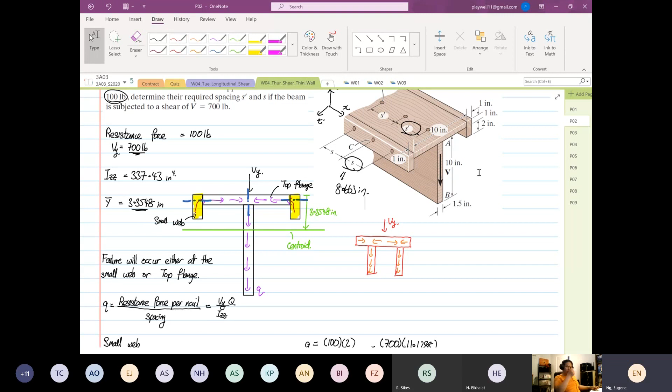Okay, so the next thing that we do, let me copy the diagram again, and I'm going to copy whatever comes along with it.

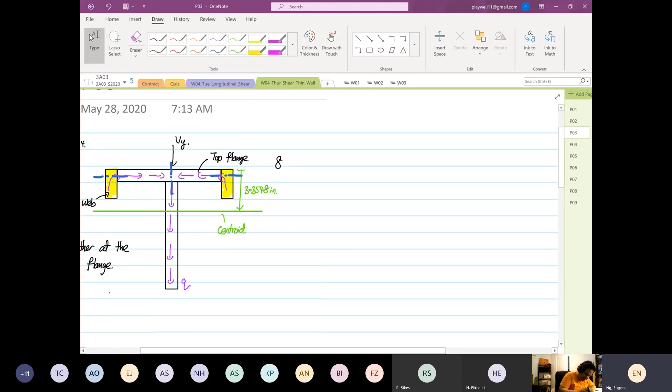Right, so the next thing we're going to look at is the vertical nail spacing. So the only thing that changed is you have to include this area now.

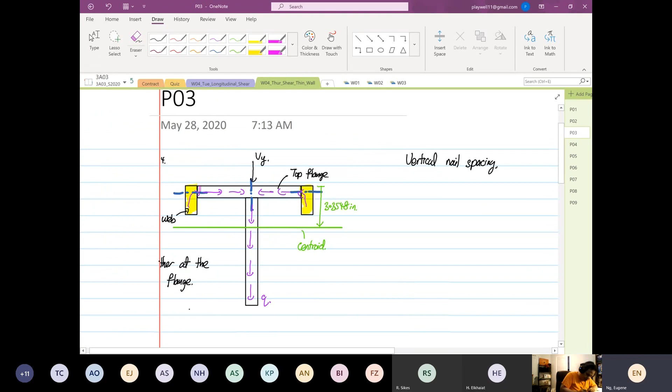For the vertical nail, the Q will be the Q of the small web plus the Q of the top flange. So we found our small web earlier is 11.1288. The width of the top flange is equal to 10.

The depth is 1, multiplied by the Y bar, which is 3.3548, minus 1 divided by 2. So this is equal to 11.1288 plus 3.3548 minus 0.5, times 1, times 10, which is equal to 28.548.

So this will be equal to, plus 11.1288, is equal to 39.6768.

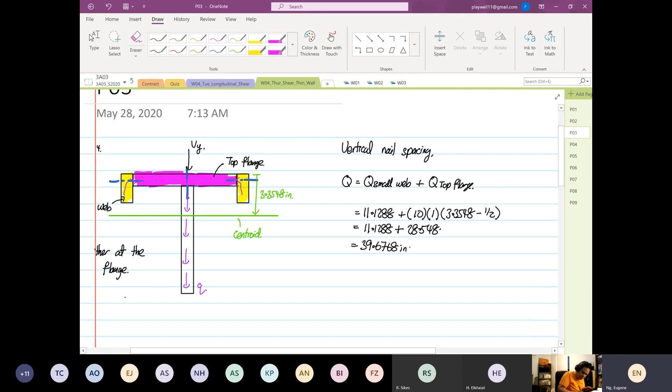So from here, again plugging in the formula, Q is equal to V multiplied by first moment of area, which is 39.6768. The values for V and I are the same.

The only thing that changed is the Q. So for this reason, if we calculate S, it's 100 times 337.43 divided by 700, divided by 39.6768. So this will be 1.2149 inches of spacing.

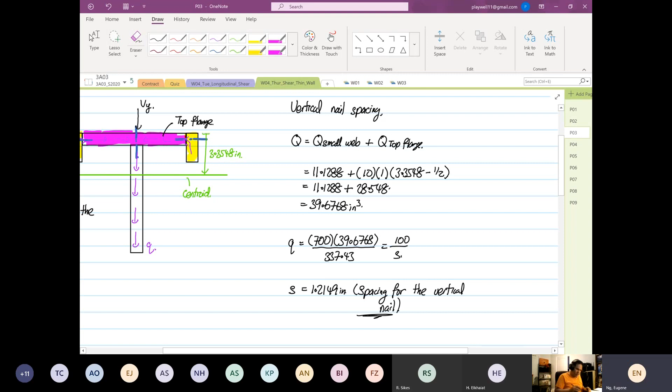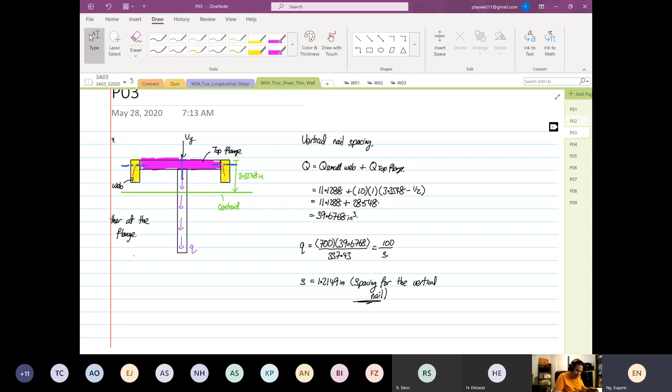So this is the spacing for the vertical nail. Because the first moment of area for Vy, or for the vertical nail, is higher, the spacing for the vertical nail, S, is equal to 1.2149.

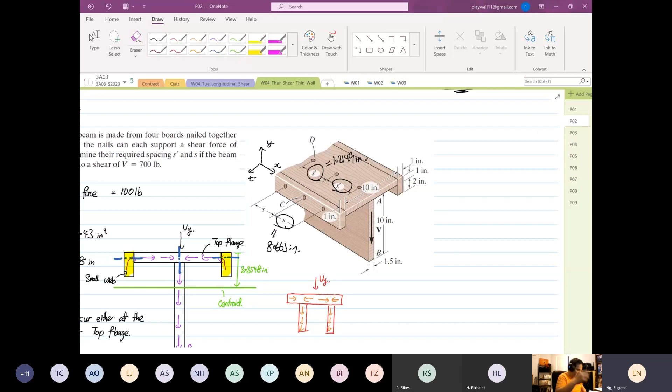Okay, so that's how you determine the spacing of the nail based on failure. Any questions so far? Do you all find this topic confusing? The rules did not change, right? You still apply the formulas: the shear flow Q is equal to VQ over I, the shear stress is equal to VQ over IT. Nothing changed. The only extra formula you learn is this one.

That's it. Okay, now I'm going to go to the next section. Before I go to the next section, any questions so far? No? Okay. So we have the shear flow entering our beam and exiting our beam. Should we always start where the shear flow enters and work towards where it exits?

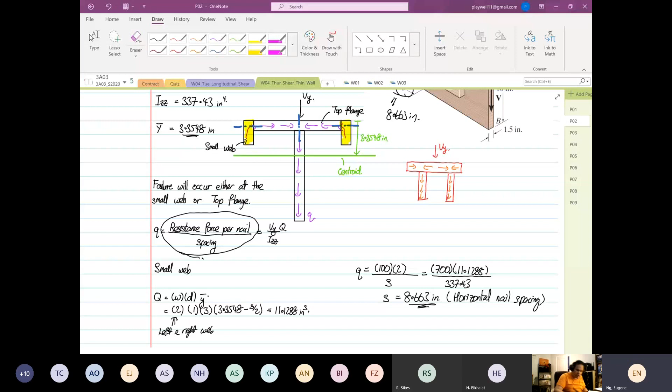So you usually start by looking at the vertical web. The vertical web, usually the shear flow will start from the top and go down to the bottom. Then if the Vy is at the bottom, you go from the bottom to the top. That's where the next section comes in. So I'm going to start a new section now. I hope that answers your question. Yes.

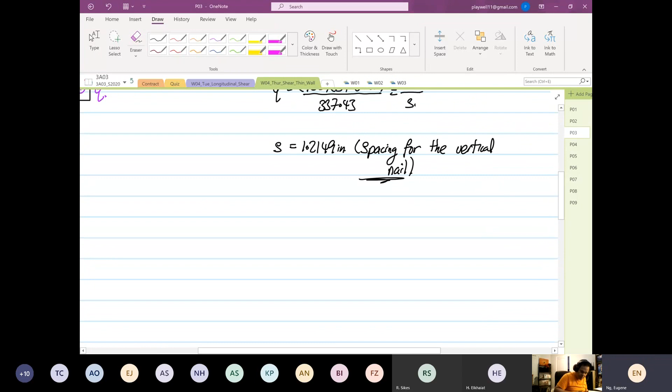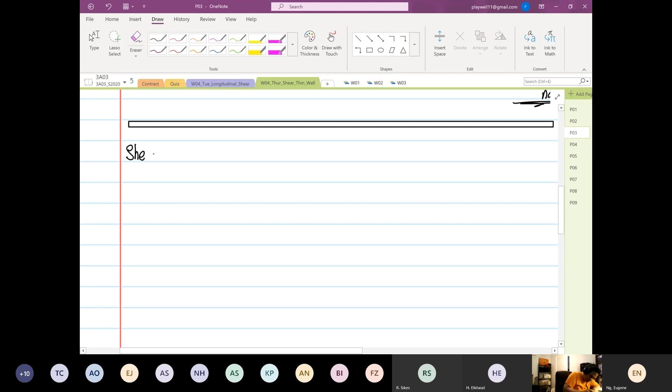Okay, so now the next section is going to be shearing stress in thin wall sections. I want you all to pay attention - this is for thin wall sections only. What we have learned so far, they're all thick wall section. So this is only for thin wall section. So the rule to apply, I'll tell you what is the change.

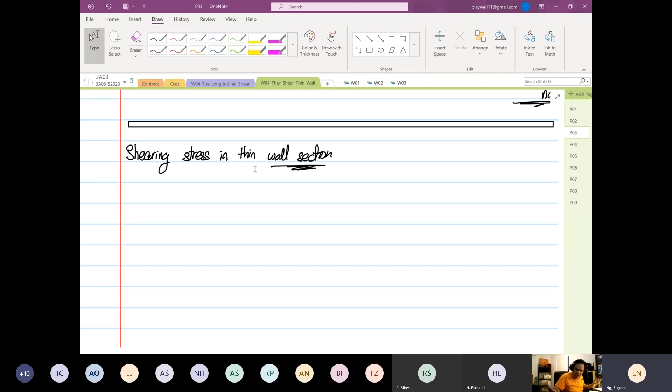I more or less have introduced it slightly to you already. So what is the change?

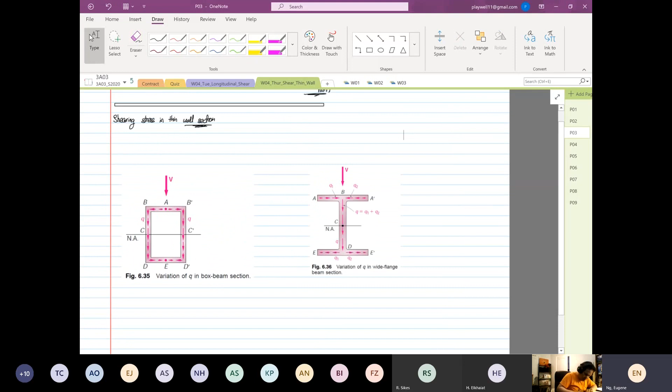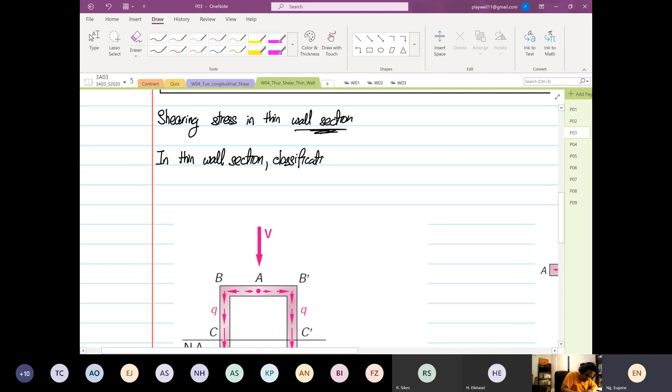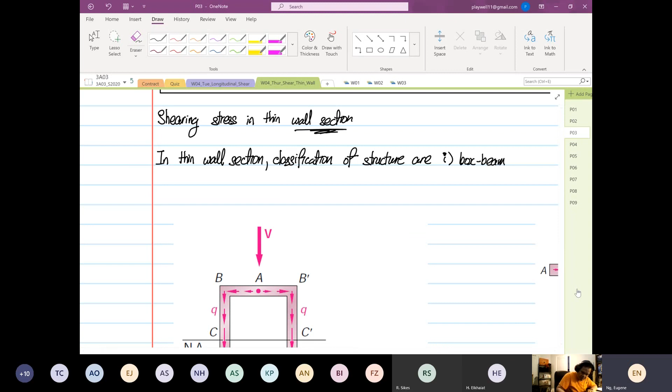So in thin wall section, we classify it into 2 views or 2 configurations. So in thin wall section, classification of structure - the first one, it can either be a box beam, right? It can either be a box beam or wide flange, okay, or wide flange.

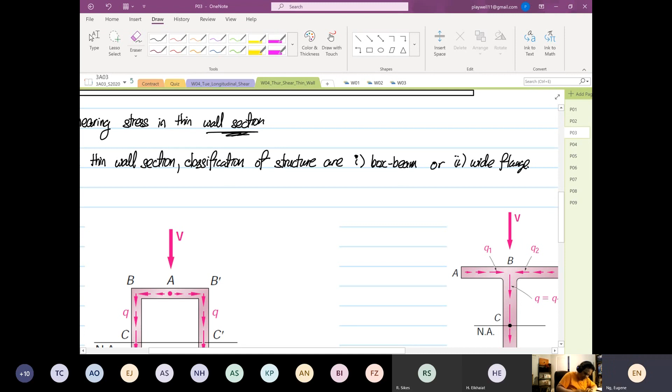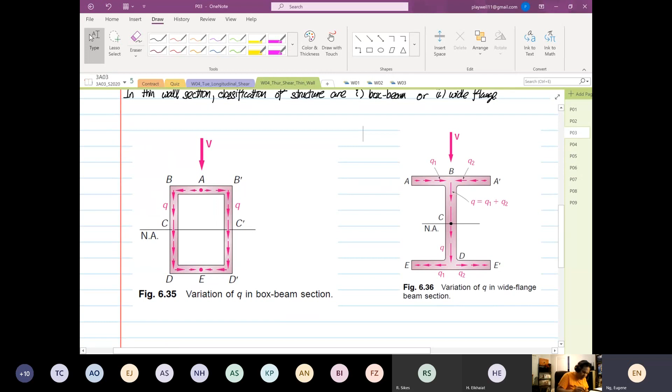So on your left hand side, what you see is a box beam. On the right hand side is your wide flange. So what is common between the two, like what I told you? First thing I want to highlight: the length of the arrow, the length of the shear flow, is equivalent to the magnitude of the shear flow.

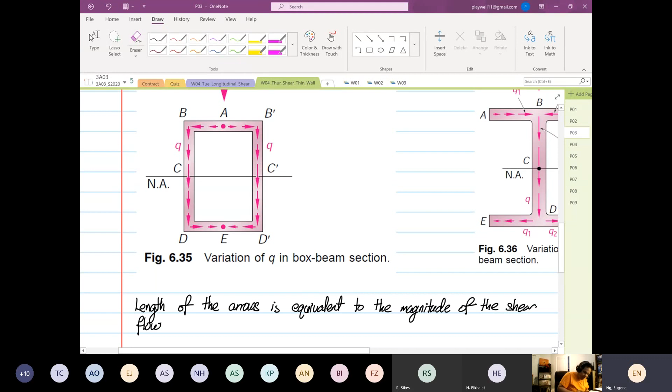So you can see at point A, this area that I'm highlighting now, the arrow is shorter. Means the shear flow is smaller. At the section over here, the arrow is longer. Longer means the shear flow magnitude is higher. Likewise for here, shorter and longer. You can see that for the wide flange.

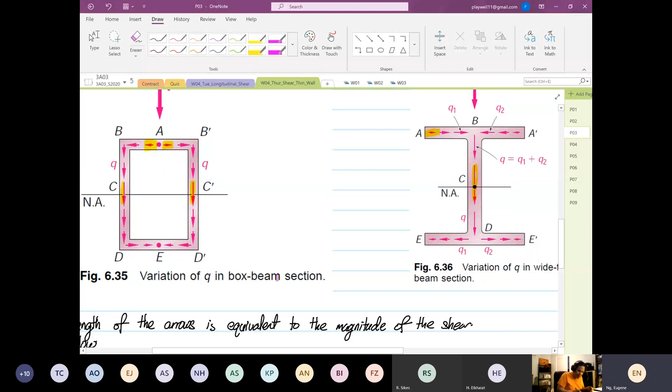So the only thing that is common between the box beam and the wide flange is the vertical web - the arrows all are coming down. Yes or no? The vertical web, all the arrows are coming down. You can see that, yes or no? Right, vertical web, all the arrows. So that's the only thing that's common.

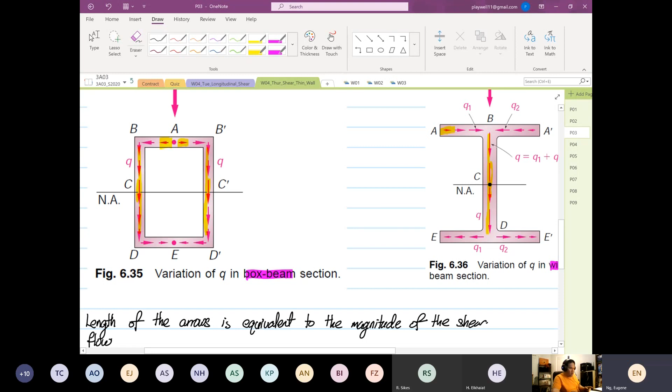On the flange, depending on if it's box beam, it will start from A and move outwards. And what controls it is, like what I told you before - you guys have seen this already, we've sketched a bit, so it should not be a surprise. The control is the vertical web. So for this case, on the wide flange it's coming towards the what?

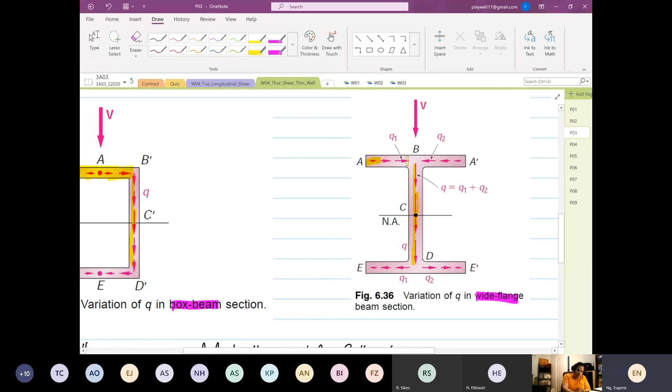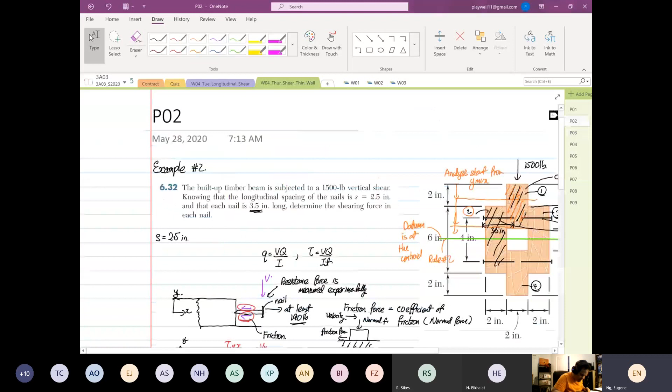Towards the center. Okay, so if you look at the previous example that we have drawn for this case, like we have drawn - this is not, you cannot see anything now, right? This is exactly how I introduce you unconsciously to make sure that you're able to sketch the shear flow, okay.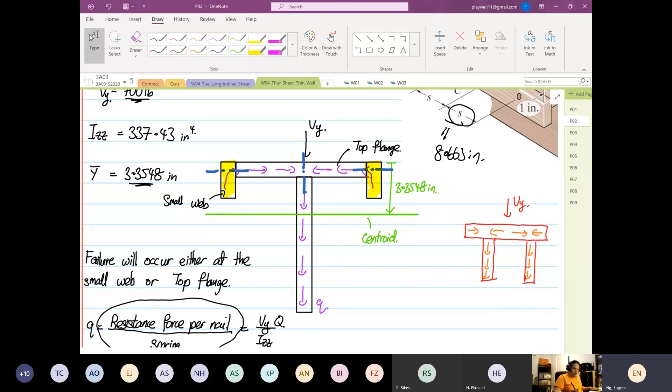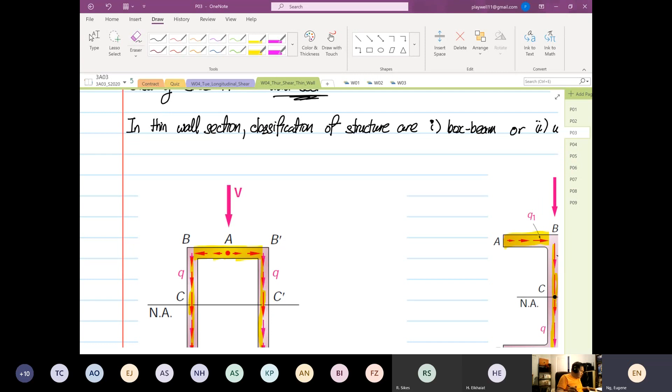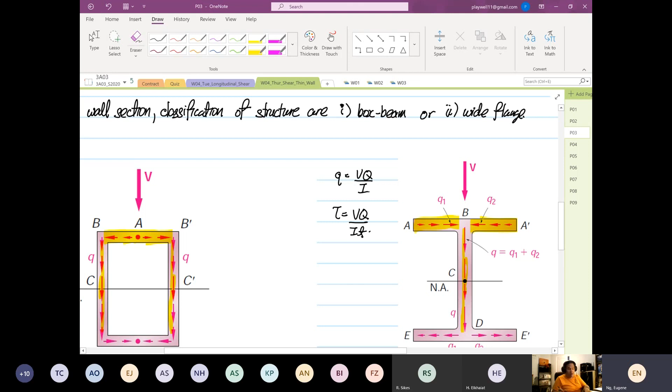So similar philosophy. Now, for the thin wall section, the thickness - so the formula, let's review a bit. What are the formulas? So the formulas to apply for both of them is q is equal to VQ over I, and the shear stress is equal to VQ over IT. No new formula is there, right?

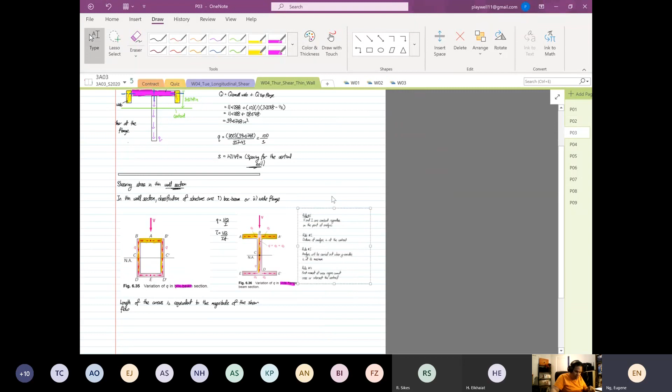And then what is still valid? I'm like a tape recorder that is not working well, I'll repeat again - rules are the same. The only thing different is this, okay, the only thing different is this.

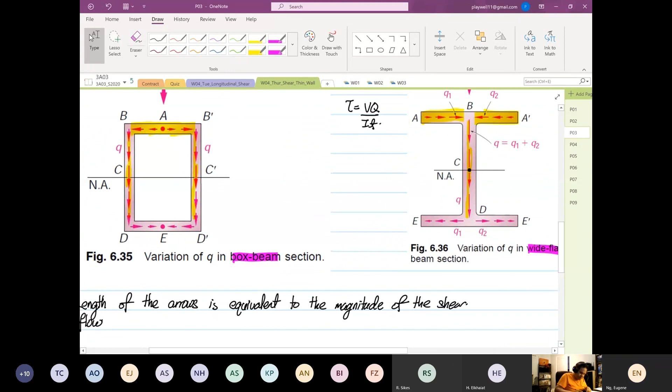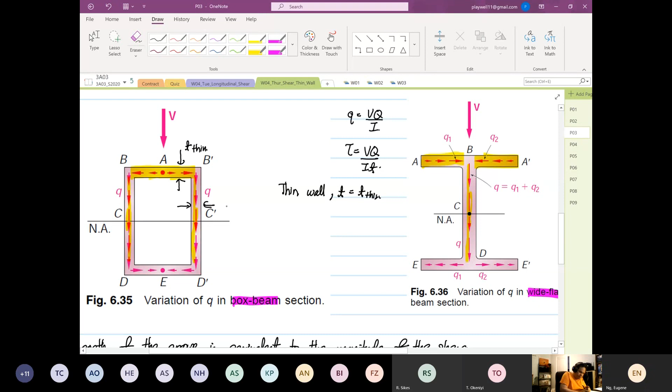For both cases, for thin wall, the T is equal to T thin. So this is our T thin. Okay, for this case, this is for T thin. So the T thin for thin wall is perpendicular to the shear flow arrow.

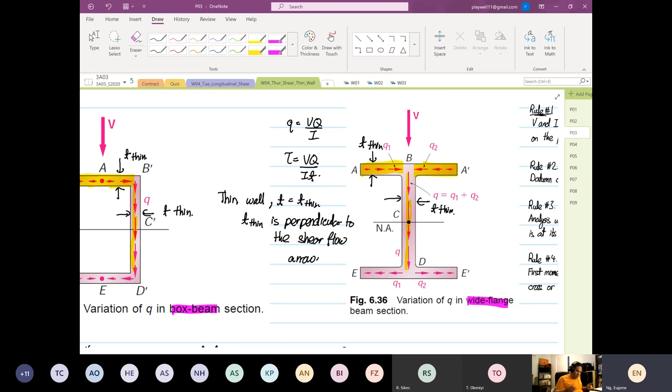Okay, any question? Right, so I'm going to do thick wall. Anyone, any question? Yeah, okay. Right, for thick wall, I'm going to say T is equal to T thick. I'm going to use a different color now. Okay, for thick wall, T - T is equal to T thick, right? So for thick wall...